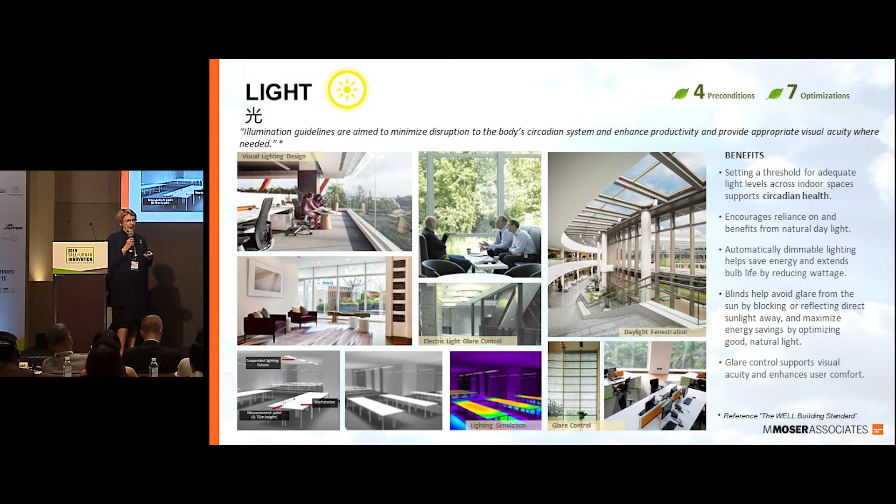In our great concern about exit stairs to get people out of a tall building safely, we've lost sight of the positive aspects of stairs to connect spaces in a building. I can't tell you how many times, when faced with large occupancy spaces, we've had to tackle very restrictive structural arrangements in order to get some stairs to connect between floors. So think about those connections when you're designing the structure.

Comfort - again we think about glare, which can be mitigated to a great extent by the design of the building itself. And for acoustic comfort, let's think about the materials being used. Lots of glass, lots of marble will reflect the sound in an uncomfortable way. We also need to think about mitigating sound and vibration from mechanical systems.

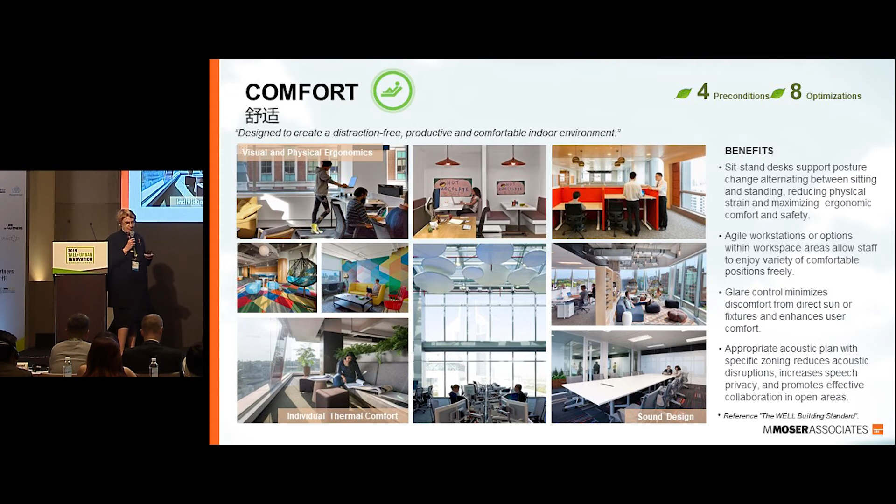We are mentally a lot more comfortable when we are in connection with nature - with greenery, natural light, open space, open views, and the view of the environment around us and outside the building at large. So the design of the building itself can enable this very important connection.

WELL has just recently further developed its concepts with an addition of three to meet further requirements and to more clearly define it. These are materials, sound, and community.

Now, every tenant space has the opportunity to become a well-designed space. What we find most challenging - and I'm talking to the engineers here, if there are any of you here - in typical buildings is, number one, the supply and quantity of fresh air, and number two, bringing more natural light into deep interior spaces. Thoughtful architecture and engineering of the base building itself can contribute a great deal to this.

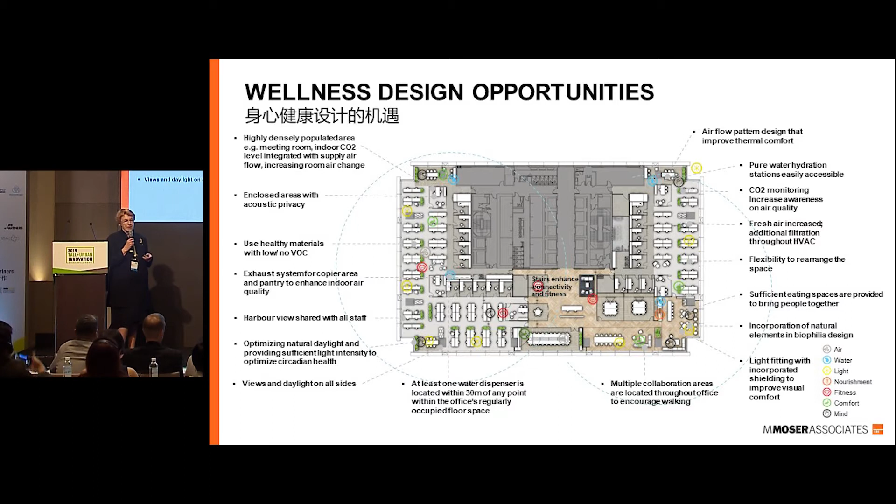I just want to show you a few of the WELL-certified projects that we've done. This is the first Asia-Pacific WELL-certified project, done in 2016. And although it was in a LEED-certified building, we still had to add filtration to bring the air quality up to the WELL standard.

For the Citi project in Hong Kong, this was the first WELL-certified project that we did in Hong Kong. From our gap analysis of the building, we had to upgrade both the filtration of air as well as the water purity in order to meet WELL standards.

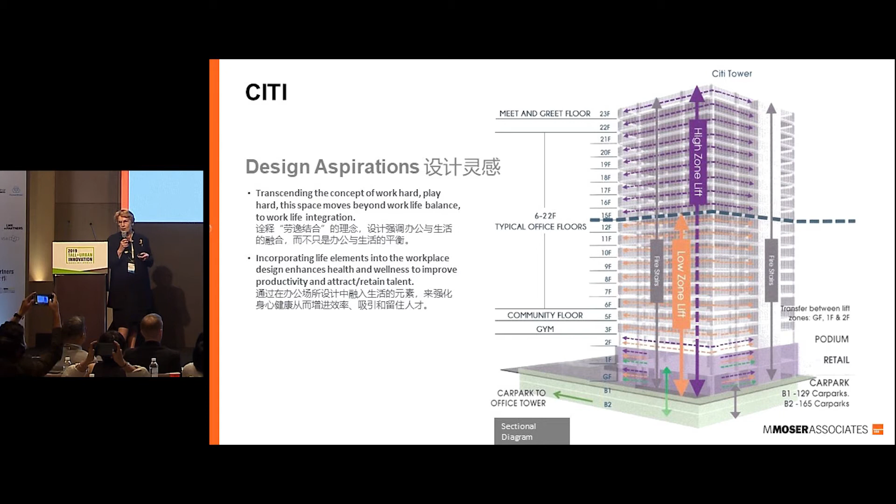Now, of course, we walk the talk in our own offices. In Hong Kong, our offices are both LEED Gold and designed to the WELL Platinum standard. And as we do this for a lot of our clients, we have to continually explore and understand in greater depth how the base building as well as the interior can support a WELL environment.

Now I'll show you a quick video of our New York office, where we've gone a step further, creating a WELL design in a 110-year-old Woolworth building in Manhattan, and creating an environment that truly enables the staff. We've gone wireless there, so please note the floor doesn't have outlets for electrical connections, and the perimeter doesn't either for cabling.

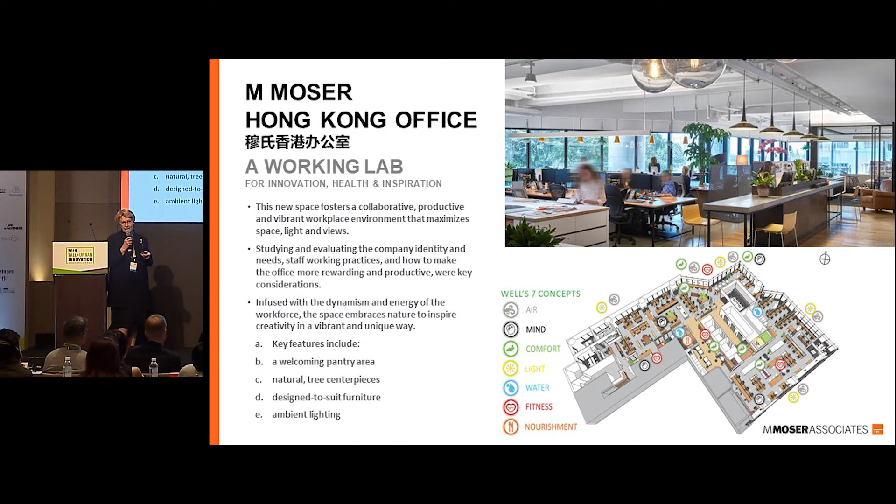We think differently about people at work. It's not just about creating a workplace, but a platform for real people to solve the world's most difficult and pressing issues.

This means creating physical environments that support creativity and productive working relationships, digital environments that intuitively connect people and ideas into communities, and a cultural environment that enables authenticity, supported by tools and methods to promote high performance. We see the highest performing organizations as those that align the physical, digital, and cultural environments.

Now, here in Shenzhen, you may be familiar with KPF's Qianhai building, the two towers coming out of the ground now for Tencent. It's been designed to be LEED Gold, and we have been asked by Tencent to create an interior environment for the workplace in those two towers that will meet WELL certification.

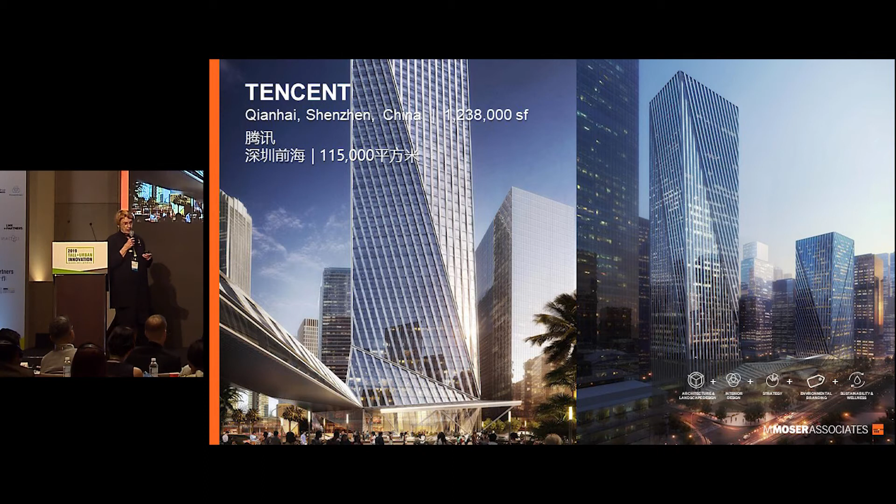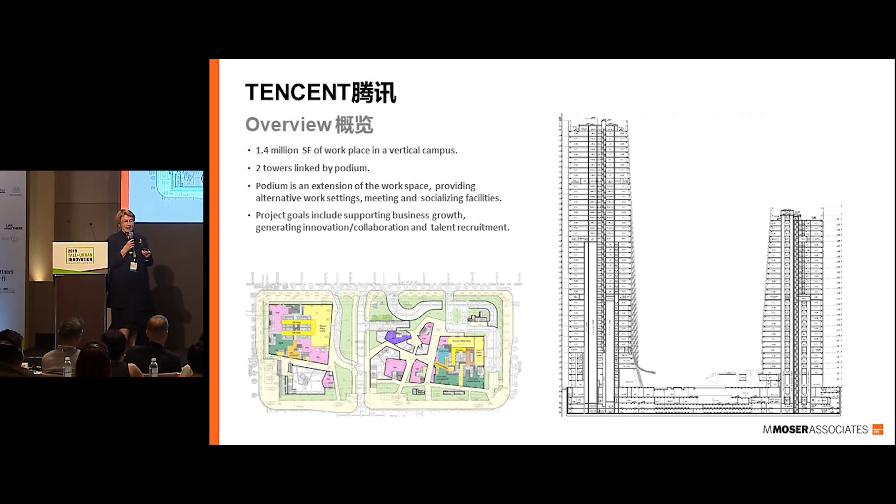We're working with the architect of record, Leigh & Orange, and the many consultants who are retained by Tencent to integrate their ideas and their input into the building design before it is completed so that it will meet WELL standards. And this has required some modifications.

From an interior perspective, the biggest challenge is that Tencent is evolving so rapidly that they can't tell us now which of their business units will be occupying the space in 2 years' time. So we have looked for commonalities, and we've created 3 typologies: the creators, the connectors, and those who focus on the financial aspects.

Now, although the building was initially designed to be commercially leased, it is, in reality, a vertical campus for Tencent, for more than 10,000 people who will be working for Tencent in these two towers. As such, it is an environment that has everything, including an auditorium, but it doesn't have bedrooms or places, or hotel rooms or places to sleep.

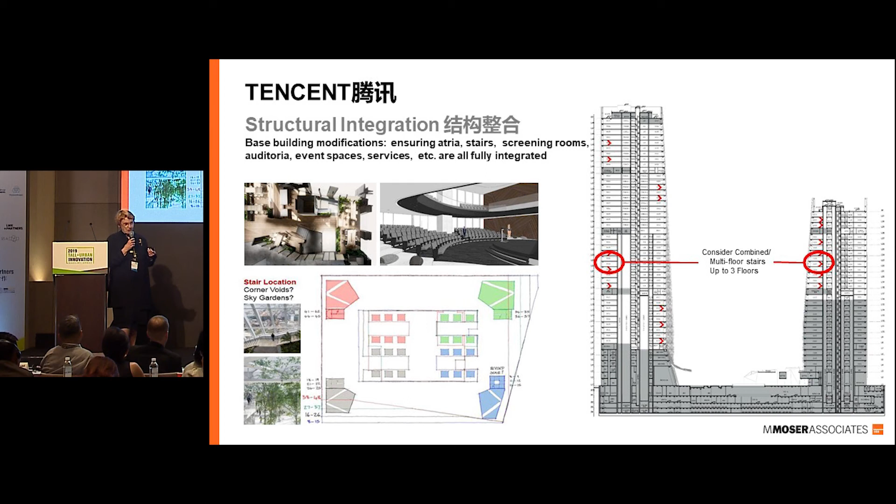As there are no transfer floors between lift zones in this building, and there is no express elevator up to a higher lift zone, we have had to work with the team to provide stair connections between lift zones for better circulation. Now, as the towers twist up, we've been able to open up 2-story and 3-story atriums in the corners connected to the relevant lift lobbies, so that as you come into the space, you can immediately celebrate the architecture of the building and feel connected to the world outside.

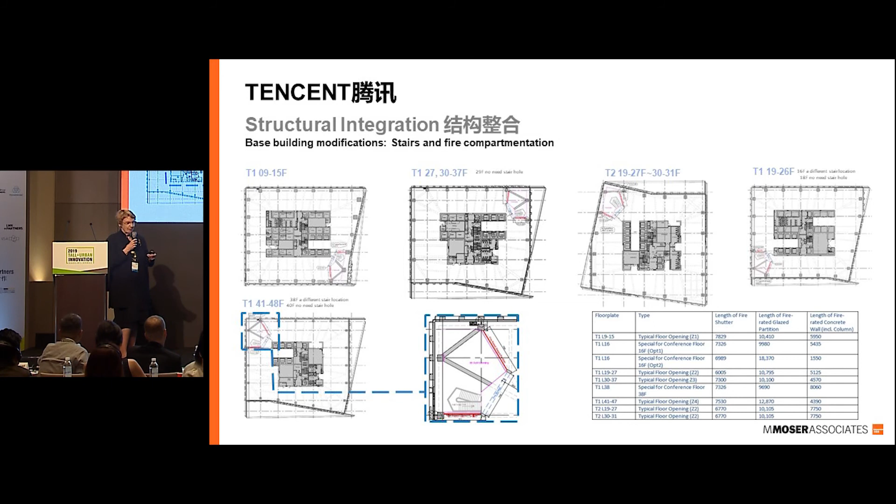Now, Tencent asked us to eliminate the initial typical acoustic ceiling with the plenum air return, and to provide an open ceiling that gives greater height and a better sense of space. So we had to do this both for functionality and aesthetics and for a sense of well-being. So the layering of the fire services piping, the ducting, and the lighting is something that needs to be designed not only for comfort and acoustics, but for air distribution and the effectiveness of the system itself.

So you can't hide your MEP stuff above a ceiling anymore. You know, most of them are opening up. So you've got to think about how is it going to be an effective upper environment up there.

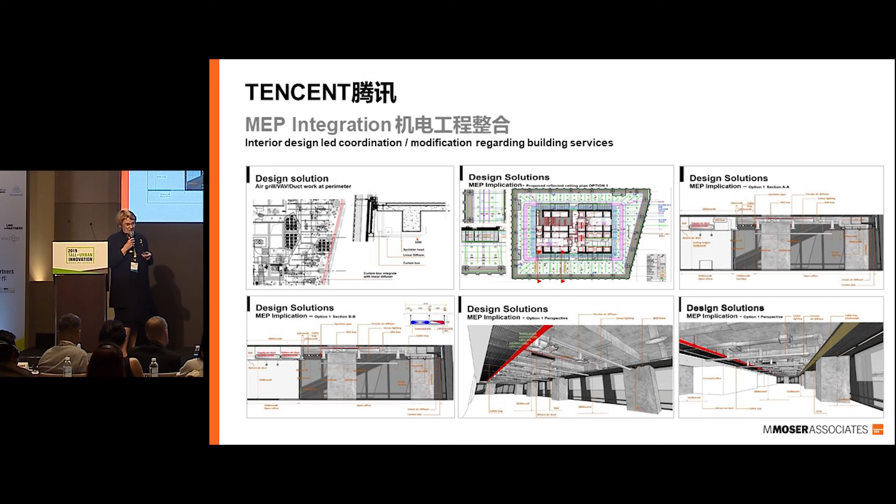Now, the two-floor podium, plus 2 basement floors, actually connecting the towers, are transformed into an outdoor atrium and urban canyon with sunken plazas that is for the Tencent people themselves. This is not a public space, okay? All of this, including retail, food outlets, and informal workplace areas, is for the thousands of Tencent employees to enjoy.

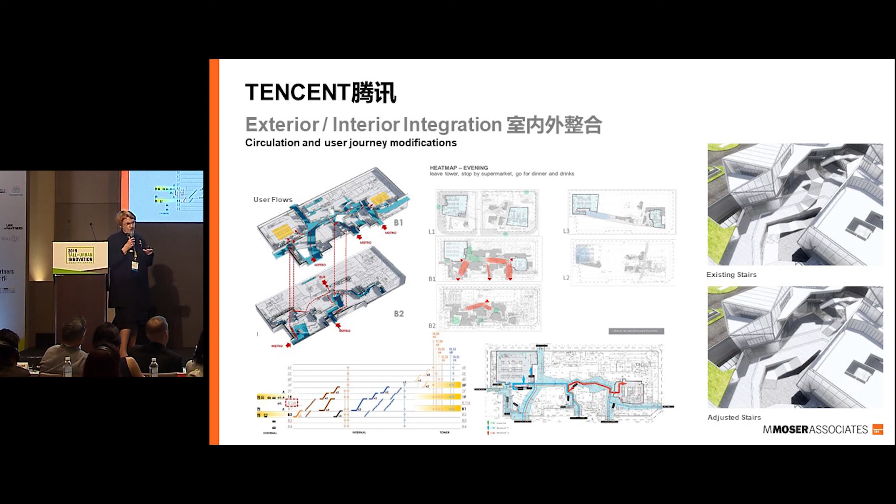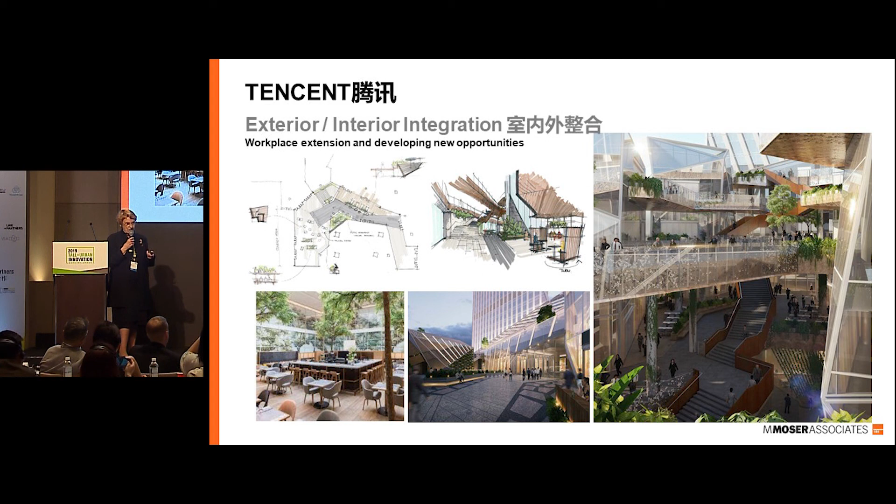The sunken plaza becomes an area for greenery and connectivity. The curtain wall is reshaped to better connect the interior and the exterior and covered with planting at the MTR access so that you rise from the underground into a green area. All of these things I've mentioned are being done to provide a more effective workplace for Tencent's thousands of employees and to give them a sense of well-being.

So as a bit of innovation, for Tencent, we have designed and have currently in prototype a workstation with a fold-out bed. Where you can take a nap, fold it out, take a nap, fold it up, put it away, get back to work. So you see, you can design a vertical workplace environment that truly is an urban habitat, even with a place to sleep.

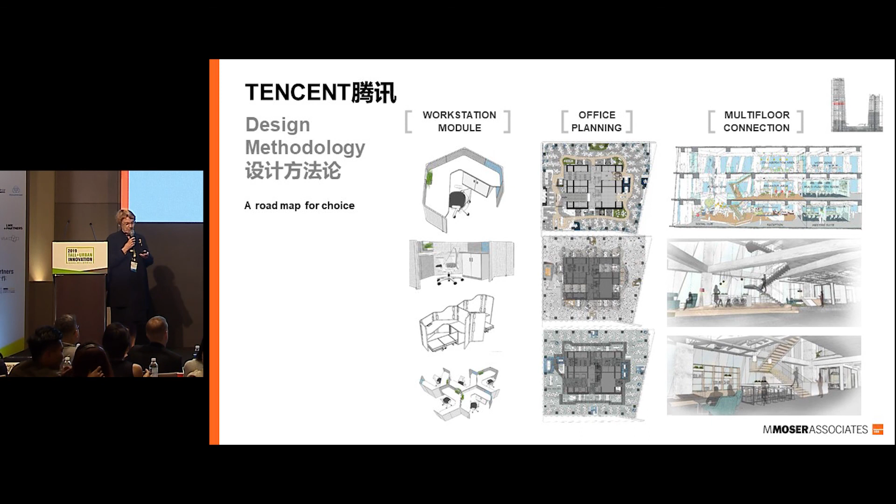So that's what we're looking at in the future, amongst many other things. Thank you very much.